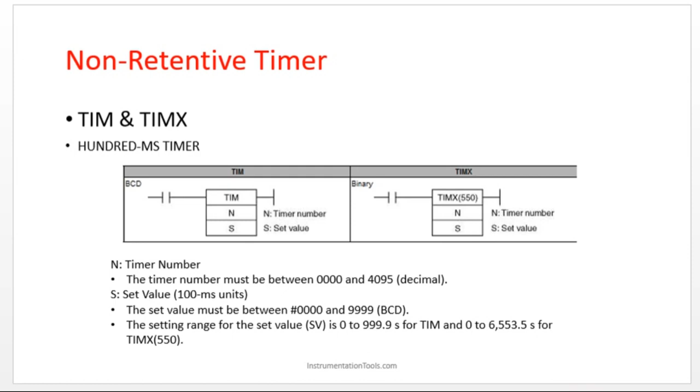Let's see how to use this timer in the CX programmer. I have created a new project, and I'm going to get a contact, and I'm going to name that as 0.00.

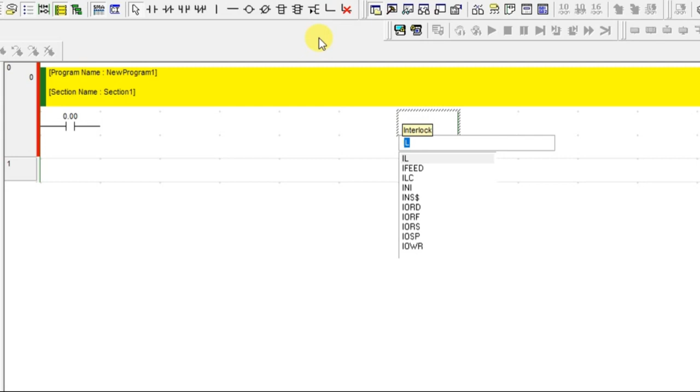So I'm going to just type I, I is the instruction. This is the shortcut for I. If you want to get the new instruction, you can click here and type I, or go here and choose the instruction. Go to detail, find instruction.

There is a timer here. In this, timers and counters are there. I'm going to use this TIM first.

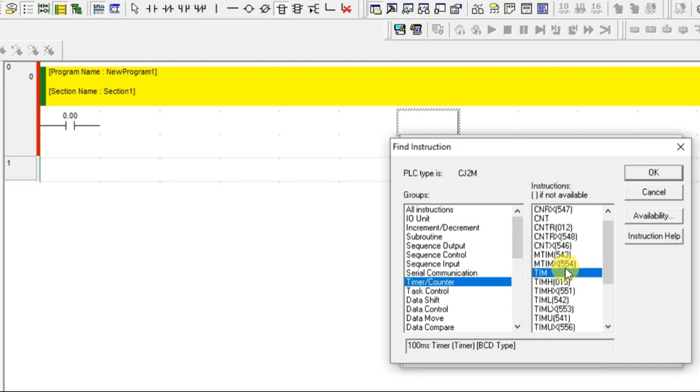Once you use the TIM, you can see this is a 100 milliseconds timer. This is a BCD type. Just choose this, and the timer number you have to give. So the timer number I'm just going to give as 0 and go for OK.

Now this is showing red color, right? So there is something that needs to be added with this. That's what it is showing, like an error. So just go again, edit. In this edit, what we have to give? We have to give the time delay.

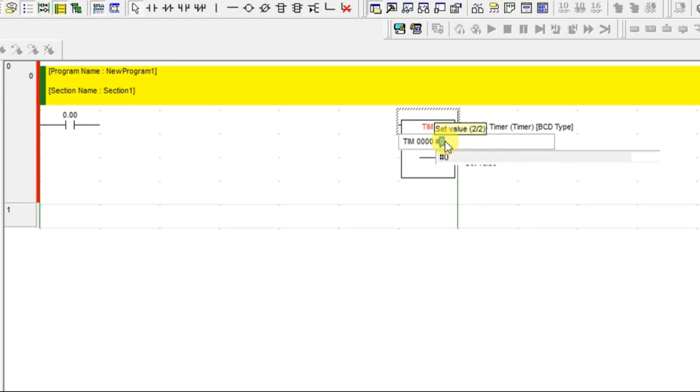So I'm giving hash. This is a format to give the time duration, the time delay. What is the time delay you want to give? You can give it here. So, I want to run this timer for 10 seconds. Since it is a 100 milliseconds timer, I'm going to give 100. So 100 into 100 milliseconds is 10 seconds. Just click OK, see, now that red color is gone.

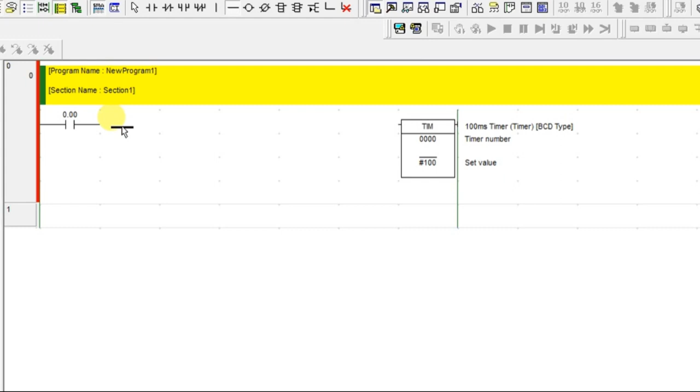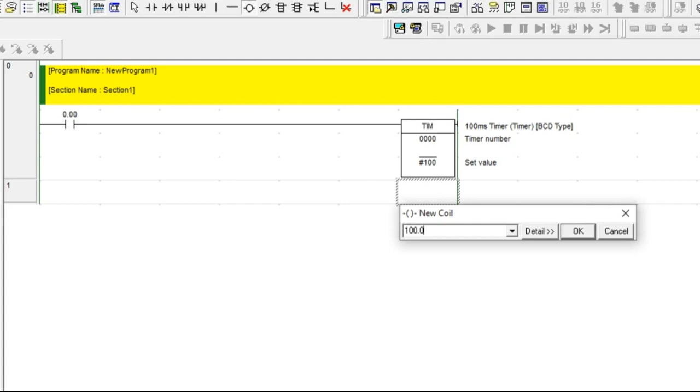So let's connect the contact and timer. And now I have to get the feedback of this timer, right? For example, you are going to turn on this output motor. You are going to turn on the motor after 10 seconds. This is the switch and this is the motor. So how am I going to take the feedback of this timer?

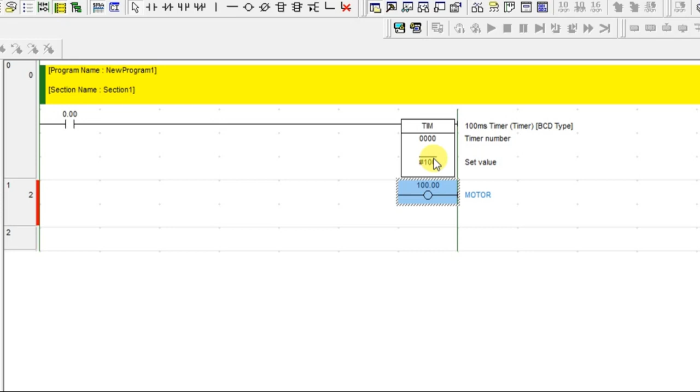Yes, you can make use of the contact itself. So the contact name should be the timer name, T0. Just click and connect. Right, so that's it.

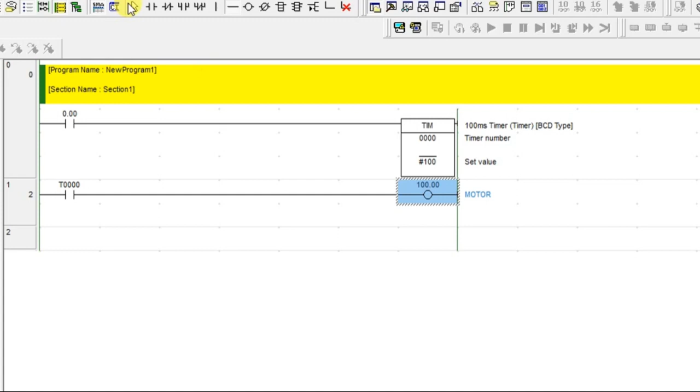So what will happen when you turn on the switch? It will take 10 seconds to turn on a motor. Right, so let's turn on the switch. Go for the simulation mode. So it is entering into the simulation mode.

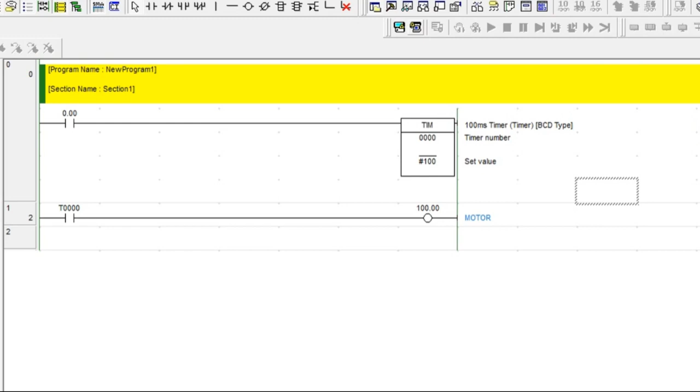So let's turn on the switch. So the timer started running. Can you see the timer is running over here? So after 10 seconds, the output is on.

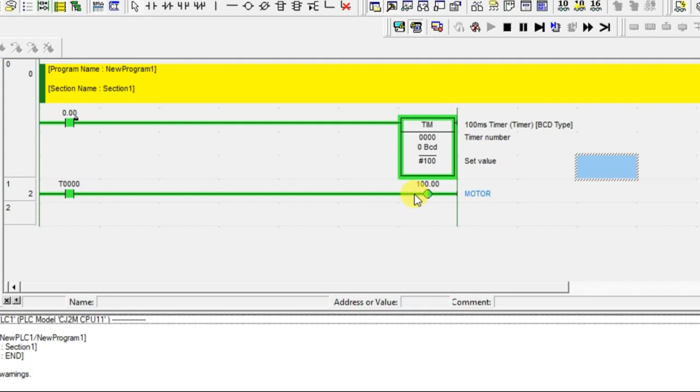So when you turn off the switch, what will happen? Your timer is off, your output is also off.

So here the hash 100 is the set value, and this timer will be decrementing from higher range to lower range - from 100 to 0 it will go. So it will start like count down from 10, 9, 8, 7, like that it will count.

So I'll do it again. I'm going to turn on. See, it started running, it started counting down. So once it is reaching 0, motor will turn on.

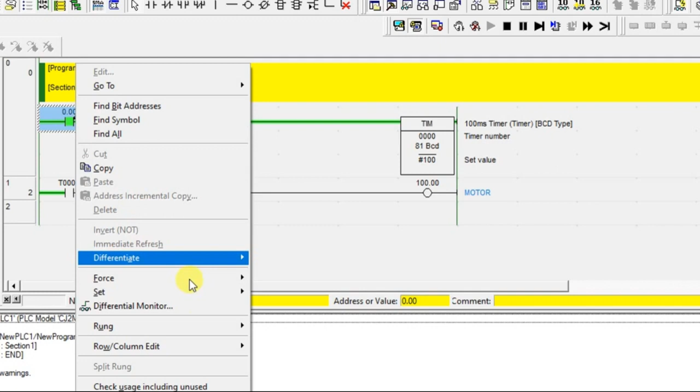Got it? That's it. So one more thing - what if I turn off the input in between? Let's see what will happen. It started running, so I'm going to turn off. Timer is off and it goes back to the previous value.

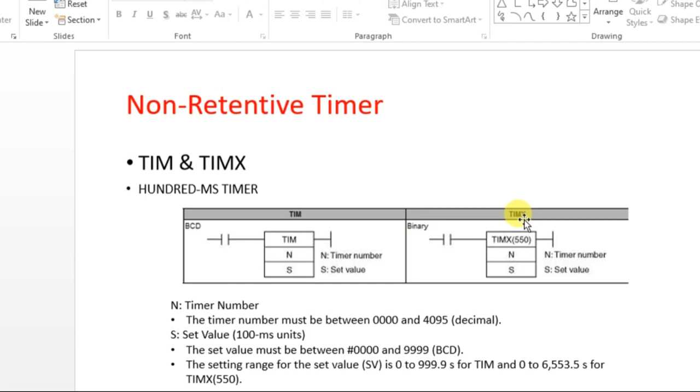So that's what is called a non-retentive timer. So let's add one more type, which is this TIMX binary type. Let's see that also.

So I'm going to have one more input here, 0.01, and let's take TIMX. Go to detail, go to - if you know the short name of that, you can choose, else go for this. Get help from this, no issues. You can go for TIMX. Where is it? Here it is.

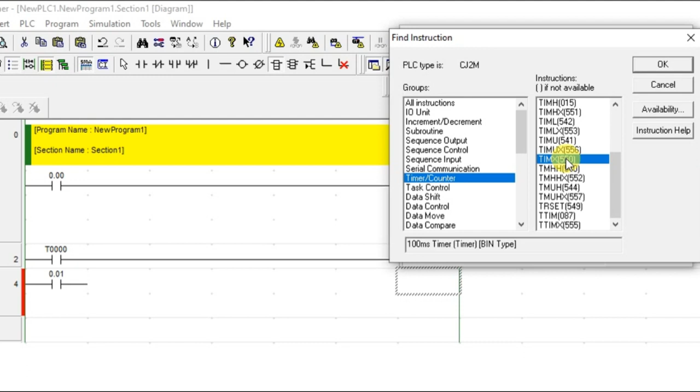So this X means there is a binary type timer. Nothing, it's the same. It looks like it, it works like it. But the value, how the value is taken, is different.

So let's set for this also, 100 - this is also 100 milliseconds timer. You can see here, 100 milliseconds timer. And one thing is, you have used a hash, no? Here you have to use this 'and' symbol, and 100. That's it, that is the difference. The format of giving the set value is different.

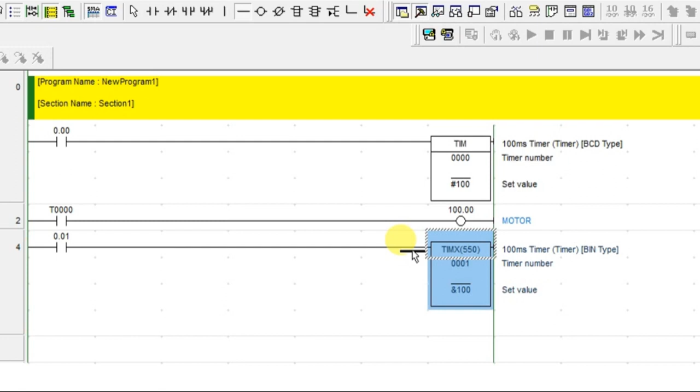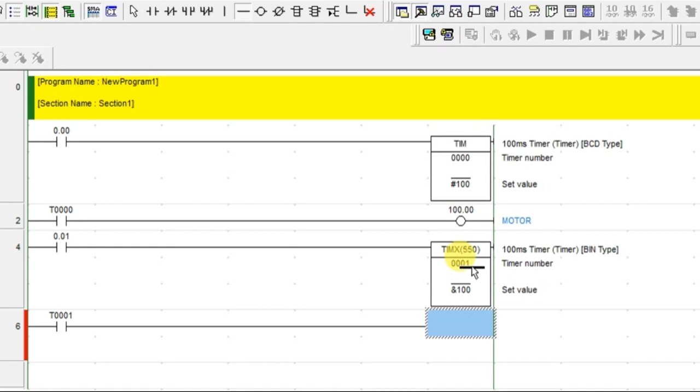Now let's connect, and you have to get the feedback for that. So it's the same like that. I'm going to give T1, so it's taking the timer contact. I need to give the same name as timer - this is the timer number now, and I'm giving the same timer number here. Let's take one more new output and name that output as another motor.

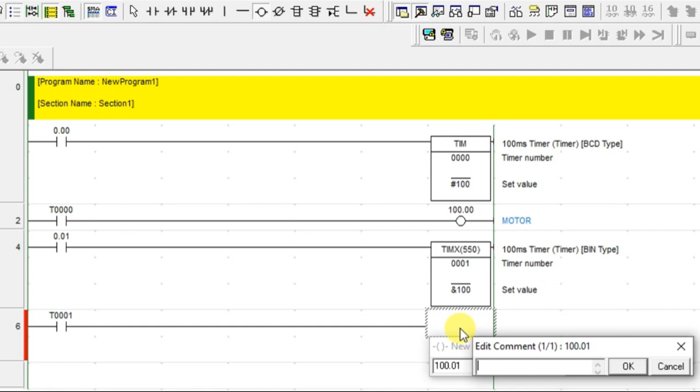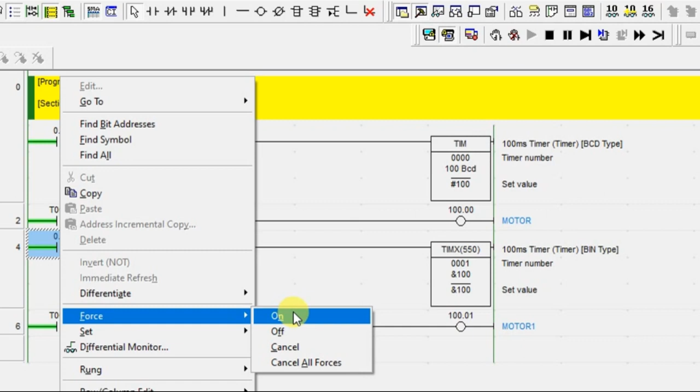Okay, right, let's go for the online simulation. So look, here also the value is changed to 100. So let's turn on this. So it started counting, so after 10 seconds automatically it will turn on.

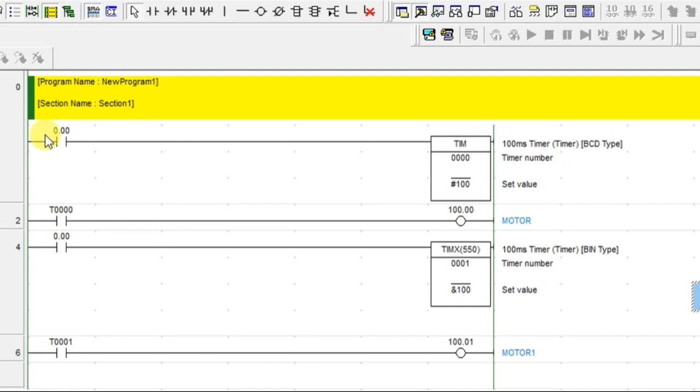Alright, so let's make this input the same as this input so that you can see both the timers are in on condition. So I'm going to delete this. Right, so both are having the same input - you see both the timers will turn on and at the same time it will turn on both the motors.

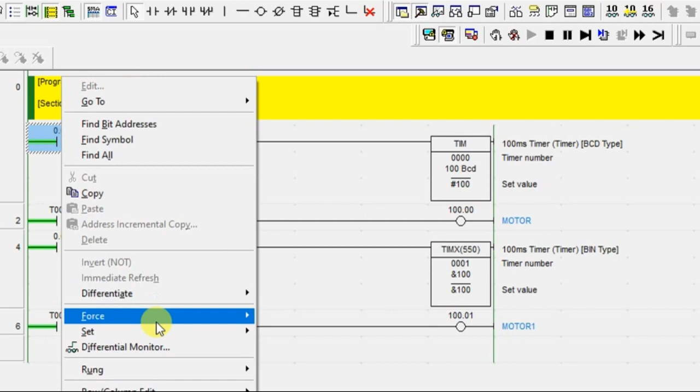So this is a 100 millisecond timer. So I'm going to turn on this. Yeah, it started running, so you can see this is off, this is off. After 10 seconds, this will turn on, this will turn on. That's it, so both the motors are on.

So this is the non-retentive type timer, and it is having the 100 milliseconds time delay duration. So the number of seconds, what is the set value you have to give, you have to calculate and give. For 10 seconds, I'm giving 100 here - like that you have to calculate. So 100 into 100 milliseconds is 10 seconds.

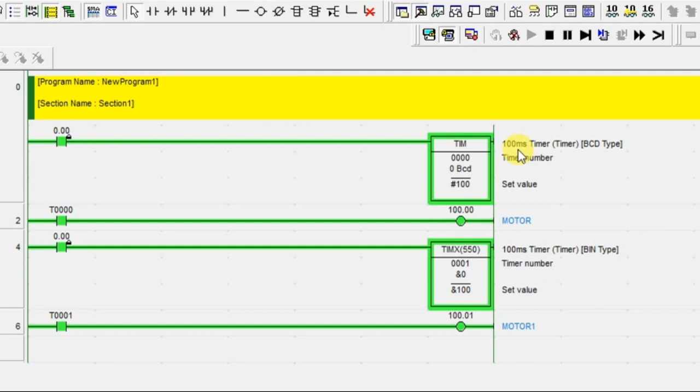So that's it guys, I hope you have understood these two timer types. So I'll meet you in the next session with another two timer types in CX Programmer.